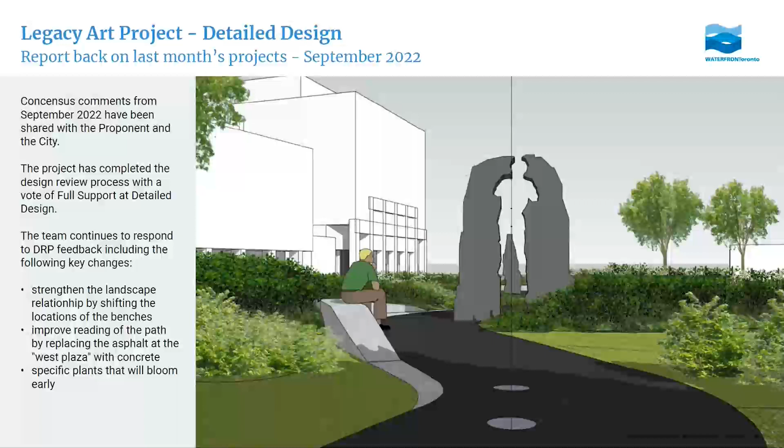Next slide. Love Park continues in construction. The red tile is all finished around the heart - you just can't see it because it's being protected with a wrapper of Tyvek. The catalpa tree is still alive, thankfully, in the middle of the pond.

A squirrel - yeah, so the project includes these little diadems, I think there's 8 or 10 of them, different animals that are going to be kind of hidden in the landscape that you can discover. The squirrel looks huge in that photo - how big are they? The scale is different than the person you see to the left. They're not that big, but there's a bunch of different animals going in there being cast.

Some of the trees have gone in, I think that's along the Queen's Quay frontage. Curbing's in, it looks quite beautiful, actually.

When is it expected to be open? It's going to open in the spring. We had been targeting the fall, and we decided not to because that would have meant commissioning the pond and then about a week later decommissioning it. So we slowed everything down on construction - not really, but they were going to try to crank to get it all finished, and we decided not to. So it's still coming along at a good pace.

Looking good. Pat, I don't know if you have anything to add - we're starting to install the trellis piece that we're assisting on, and that'll all be installed in the next month. So this would open like May, June, probably.

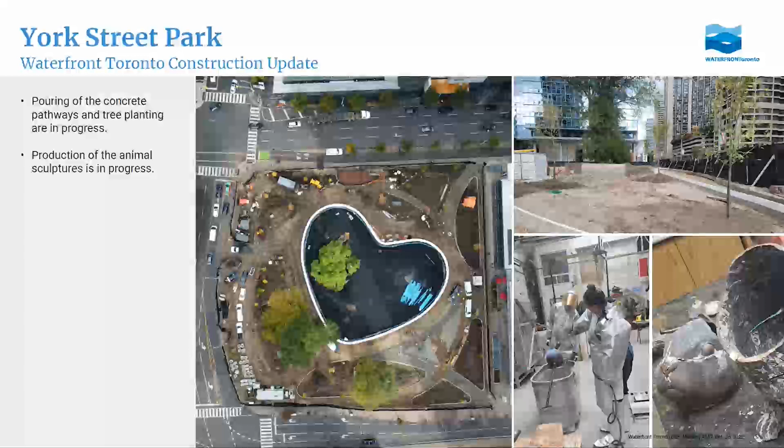Okay, next slide. Gorgeous. Yeah, that's brilliant.

You want to go through the upcoming agenda, Leon? Yeah, so next month will be the last DRP meeting of this year, and we are looking at Rees Street Park schematic design coming back. We also hope to bring both Destination Playground and the Destination Playground Pavilion back for schematic design. Jenna's team is working on the pavilion.

And for January next year, we are looking to bring back the Villiers stretch of the Waterfront East LRT to the panel. You've previously seen various segments of this East LRT. I think this will be a schematic design review, actually. And of course, Parliament Slip — that one is also gearing up to come back for schematic design.

Yeah, part of why we're bringing the Waterfront East LRT back is we've made a couple of changes to the original proposal, so we want to share those with the panel. Has the pool moved? Oh, I was talking about Villiers, not Parliament. In Parliament Slip, well, maybe — we're contemplating a few things. You guys gave us a pretty robust set of comments on it, so we've been reconceiving a whole bunch of aspects. It's going to look fairly different than what you saw last time.

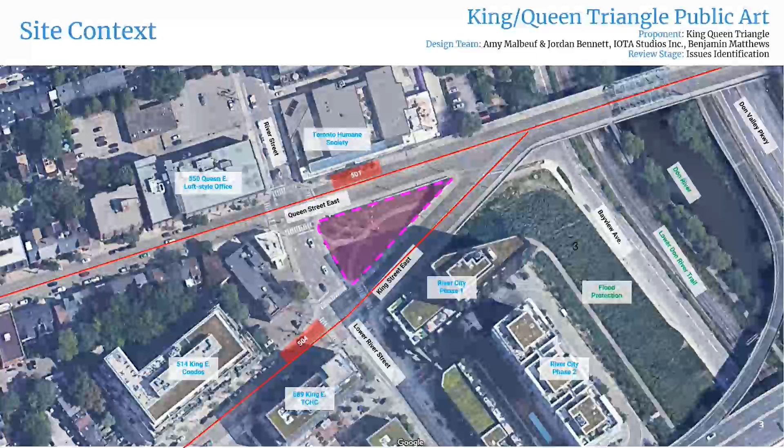Here's an aerial perspective of the site where you can see the adjacent buildings, the street details, the streetcar tracks on King and Queen Streets, the bus stop on King, and the forked path through the site. The river is nestled in the green swathe at the top of the slide. The triangular parcel of land is approximately 1,265 square meters.

The vision for this public art opportunity is to transform this undefined transitory area wedged between high traffic transportation corridors into a welcoming gathering space for nearby communities and the public at large. Given that the site received minimal public realm treatment, artists were given the opportunity to alter the site's landscape in order to accommodate the artwork and make the area more welcoming and accessible to the public. However, this can only be done in ways that do not undermine the integrity of the landform. So artists had to identify and subcontract a landscape architect familiar with the constraints and opportunities posed by this landform.

I'll read out the objectives set out in the artist call because I think they're important to keep in mind as we move forward. So the list of objectives in the call to artists read as follows.

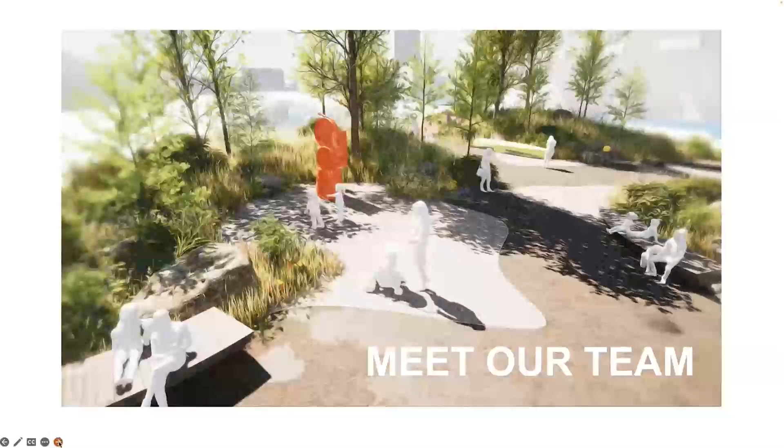Our team is highly experienced and includes Blackwell and their structural engineers who have worked on Jordan Bennett's well-known installation Tefkik, and is experienced in working closely with Indigenous individuals and artists. Mulvey & Banani are our electrical and lighting engineers and can integrate lighting design into the sculptures and walking paths. Grounded Engineering are our geotechnical engineers and will provide recommendations for foundations and earthworks.

We will be working with fabricator Punch Clock Metalworks, a metal fabricator located right in Toronto with public art experience at nearby sites. IOTA Studios, my organization, are the project managers for this public art portion, and Benjamin Matthews is our landscape designer, working closely with the artists selected for this opportunity, Amy Malbeuf and Jordan Bennett.

So led by the RFP requirements and also the project concept and the artistic concepts, the project principles and goals are creating a strong relationship to the surrounding streets and communities, creating a sense of comfort in an exposed and constrained space, encouraging visits and welcoming the public to stay. A landscape that further enriches the project narrative, tree and plant species selection that reinforce the overall concept, an emphasis on connections to water and the river, material innovations that weave into the storytelling, reaching outwards across the man-made boundaries of the street, the bridge, and the steep fall to the river system below.

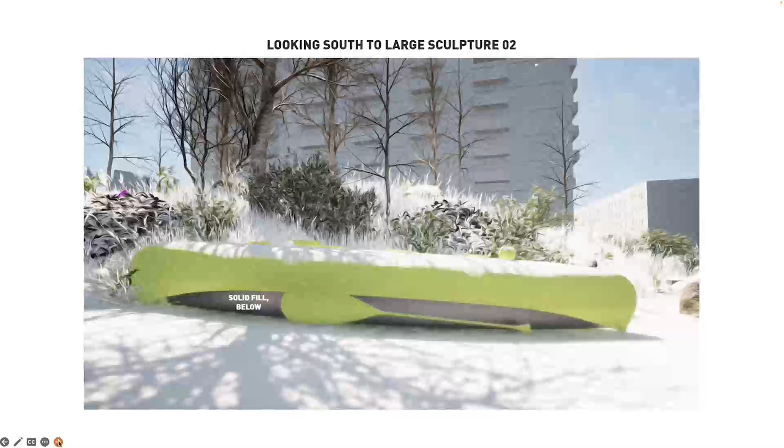We're interested in the history of the Don itself. We want to explore the natural meander it once had before it was straightened, and look at how people navigated this riverway before the industrialization of the city and the straightening of the meander itself. We looked into and explored the sediment and depositation of different wrack lines that can be formed throughout the movement of water, and how those wrack lines deposit debris, natural and man-made, along the rivers and waterways throughout our communities and gathering places in cities such as Toronto.

Through this concept, in conversation with Ben Matthews, we came up with the idea of exploring the storm wrack and placing our sculptural forms within the landscape to echo and create a narrative through the placement of each piece.

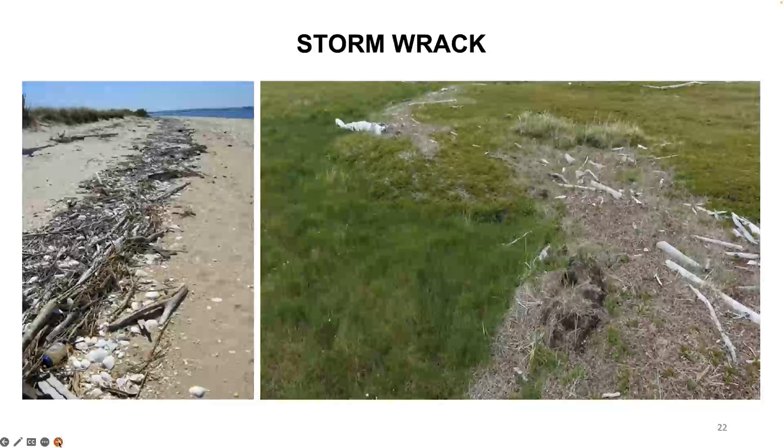This is more contextual to the site, looking at the various ways debris starts to hang up on bridges or natural features, and how we might learn from that and start to convey a story on the site that is both sculptural and landscape driven, hinting at a possible event or future use of the site through its forms and sedimentation of natural materials, but also man-made materials.

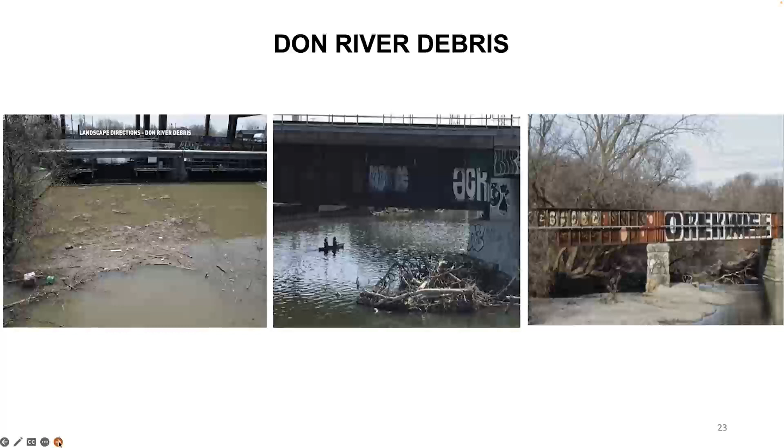Here are some examples of the more man-made deposits that you may be familiar with in the city. Showing this history, you can really see the history of a place, an event, a moment, or an individual story through the depositation of different elements.

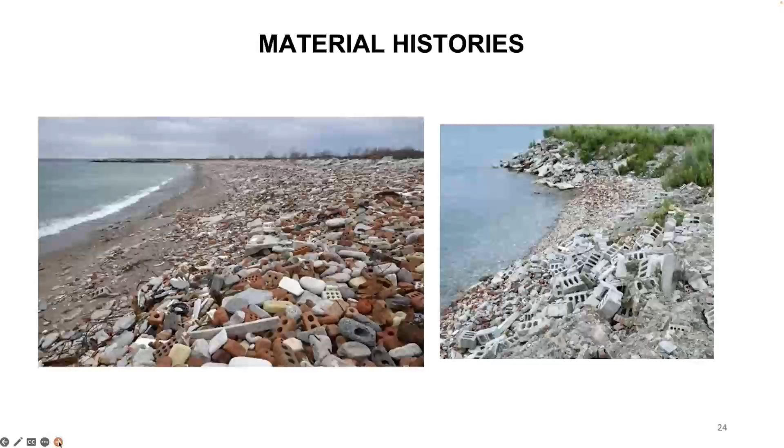Discovery through movement is huge for us, creating this narrative for visitors, for people coming through the space, and for people who call this part of town home. The gathering of multiple stories and material histories is parallel to the city of Toronto as a site where various Indigenous nations have historically and still reside and gather today.

As I mentioned earlier, we pulled inspiration from a canoe trip we were on. From this inspiration and experience, we were able to place ourselves in a creative space to conceptualize this project. Through meeting with local community and invested community groups, we will continue to refine and explore this inspiration and add to the concept. We're really excited to be coming to the city to meet with folks in the near future.

The objects that we place in the land are figuratively and metaphorically what you might take with you to survive and thrive in the event of the catastrophic flood. Their placement depends on how they would physically be deposited due to the rise of water levels and where they sit on the wrack lines created by that rise.

Through thinking about the resilience of Indigenous people, of hardships faced, and how we have continued to thrive through our use of humor, color, and art from our respective communities, we imagined a whimsical, colorful installation teeming with points of conversation, visiting, and awe for everyone who passes through the space.

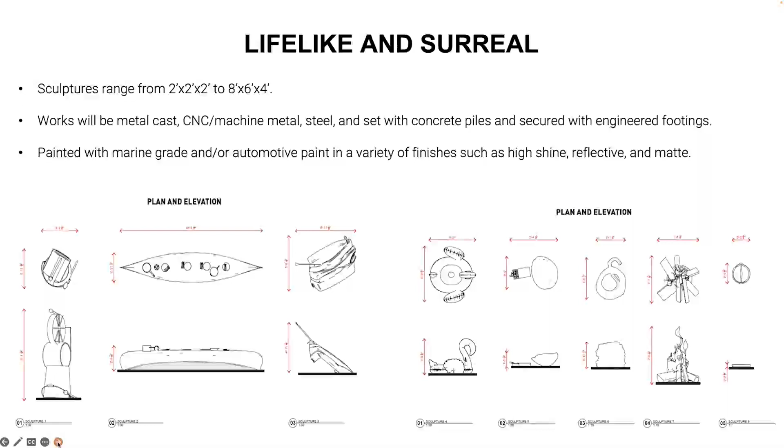The sculptural elements are relatable, tangible, and can generate an individual's own stories or narratives from their own point of reference. Some examples are a canoe and a cultural belonging such as a smudge bowl and other things you may have with you on this trip.

This point of thriving, the power of the object comes from the relatability of the objects. They pull story from the individual visitors to the site so that they can sit with and visit with their own stories. For myself and Amy and our team, this idea of visiting is very important as it informs our communities still today. Thank you.

Thanks, Jordan. So this is the site plan as it stands today. Again, you're seeing the FPL crest halfway through that site with the dashed line. Everything on the right side of that is the wet side, on the left side, the dry side.

As in nature, I think a lot of the deposits, landscape and also sculptural, occur above this crest, as if they had washed over in one of these larger events and begun to cluster around natural features, rock outcroppings, trees, little gullies in the landscape. There are a couple features below this FPL crest that we'd like to explore. They do become more complex with the low cover above the landform.

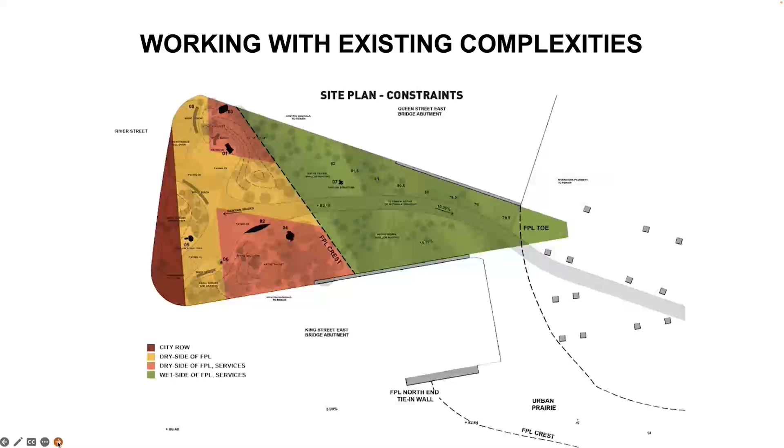You'll see here, this is the existing grading plan. Above the FPL crest, slopes are around 2%. However, as you start to move down towards the river, the pathway is just above 10%. For the time being, we've been told to leave the path as is, so the accessibility on that portion is a bit limited. Next slide, please. We're going to be looking here at an aerial view of the site.

You'll see existing, there are actually 17 small trees, pyramidal oaks and maples. Some of them were actually planted on the wet side of the FPL, which they should not have, and others are not doing so great. So we will need to replace trees as we move forward and also increase the amount.

The existing hardscape is asphalt pathway, and there are 8 large slabs of armor stone as well that we have considered for removal or reuse on site. And then, as you saw in the earlier photos, there's the concrete abutments that sort of create the triangle. Next slide, please.

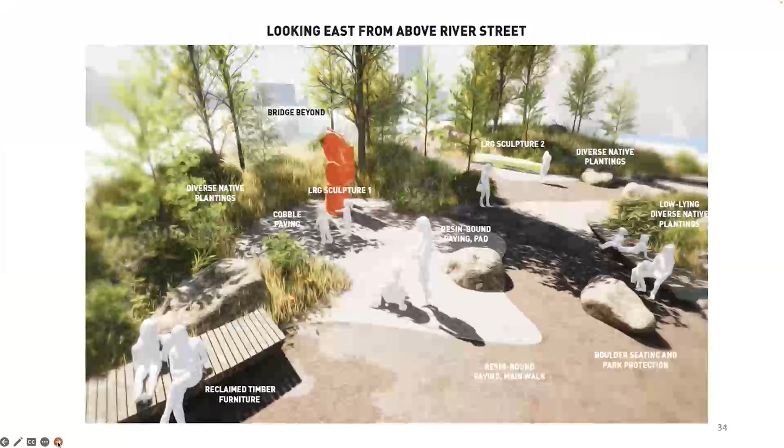The other piece of the material puzzle is the furniture. If you go to the next slide, please, which is expressed in a few small wooden benches that start to cup the landscape areas and accentuate the soft curves of the wrack lines.

We're excited to explore sourcing of these materials that is eco-friendly, and also starting to explore the form of these, looking to play off of those images we saw of the debris formations around bridges, how this timber furniture can really become unique and expressive. Next slide, please.

Here we are looking from the west side across the main plaza space adjacent to River Street. The planting areas are all native plants, low maintenance. The hardscape areas, you'll see there's sort of pads of varying colors and shapes. These would be the resin-bound pads in the foreground, and the main pathway as well.

Next slide, please. Just a front-on view to the wooden benches. These would be places to stop and invite people to stay a while. They would also be opportunities for additional lighting beyond what is supplied at the street and in the sculptures.

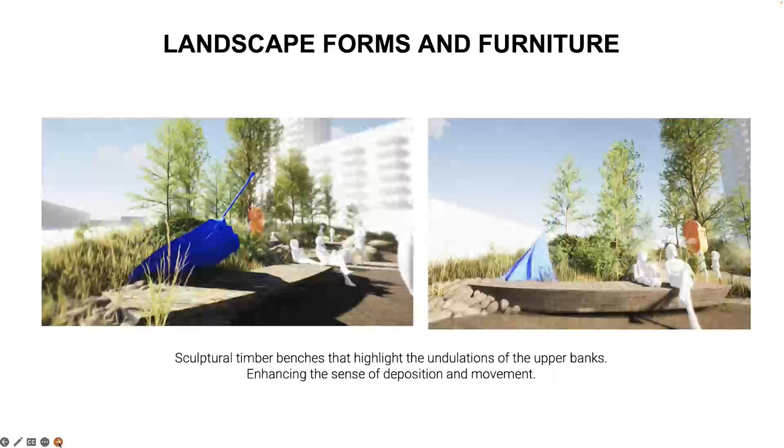Next slide, please. So again, just in terms of planting, the wet side augmentation of the existing high grass prairie, which has currently become a mown lawn. It hasn't been maintained the way it could be, so we'd like to look into maintenance strategies that will allow for that to become much more natural.

And then the feeling of the shoreline really wants to be expressed on this side of the FPL crest, and we'll be working hopefully with the TRCA, with parks, and also groups involved with the Don River and Portlands projects, Minokamik, to start to think about plantings that are both ecologically valuable, but culturally as well.

Next slide, please. In terms of lighting, since it's a small zone, we don't think additional lampposts will be needed. Lighting will be much more aesthetic and architectural, with a little bit of path lighting needed, so soft washes over trees and grasses, as well as onto sculptures.

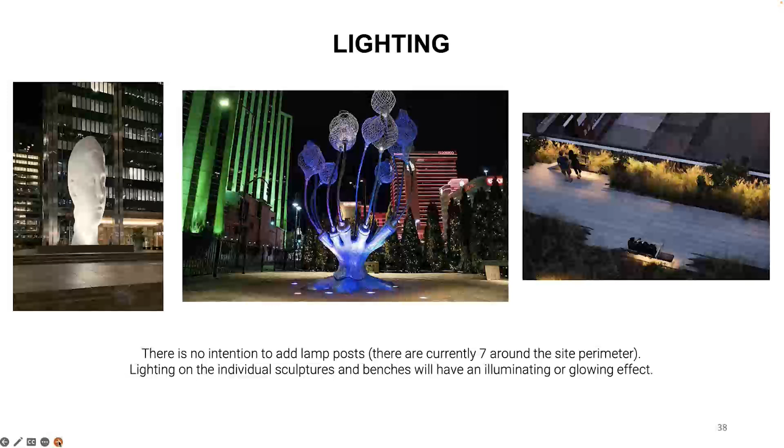Jordan, do you want to speak to this one? I think this is a really playful moment.

So this is an example of what I was talking about earlier, this thriving and this use of humor within our communities, and looking forward to see the bright in sometimes the dark. So this is just one way for us to show this thriving, this resilience of Indigenous people, and this joy and playfulness that our community still holds strong in our everyday. So, well, thank you, everyone.

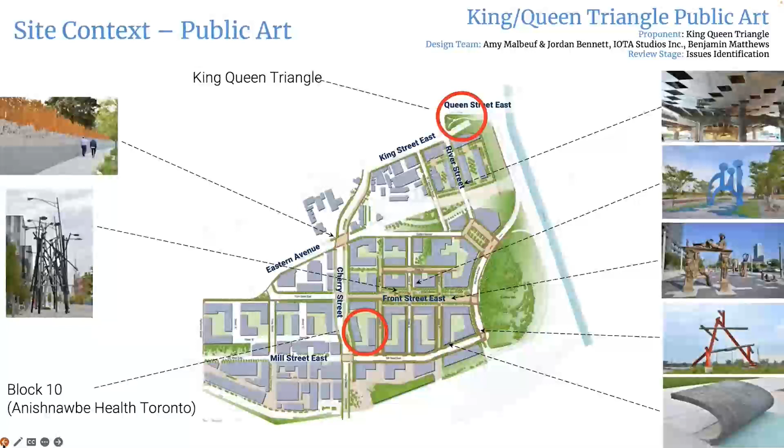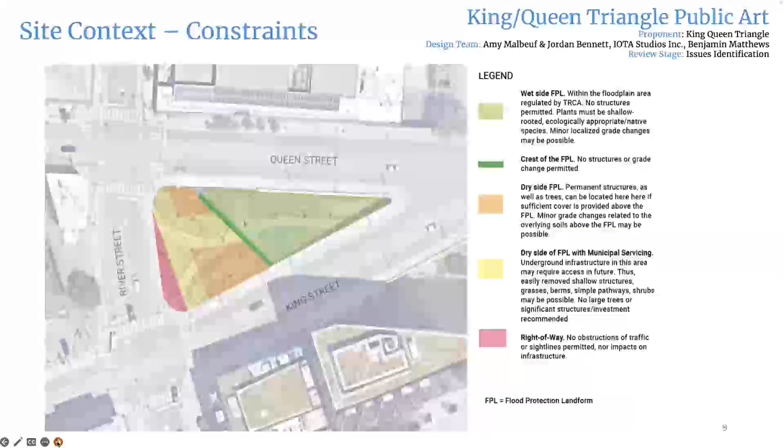Yeah, would you want to discourage it? It's a good question, I don't think so. I think there will be, if you saw the renderings, natural borders and boulders and such, so it won't be as direct a route as it is today. I wouldn't want a fence and a sign that says please dismount, but I think naturally, as it gets used more by pedestrians, it will feel much more like a pedestrian zone than a cyclist zone.

Thanks. Murray, I think slide 5, can we take a look at maybe slide 5 or so? There's one of the context slides with an aerial view showing the surrounding context. Slide 3 or so, a bit further up. Further up, okay, yeah, at the beginning. Yes, there we go, thank you. I can't see all of the slide numbers. There we go, okay, there we go. This good? Yeah.

So, from when I've gone to the site, I can see that most people, when they walk through the site, they're crossing King Street and going towards Queen or vice versa. That's how they cross the site, at the base of the triangle.

And as I say, the few cyclists just go down underneath the viaduct. But mostly the flow of people cross King Street going towards Queen Street or vice versa. I don't know if that helps, but we can definitely come back in the next session with more information on that. Thanks, okay.

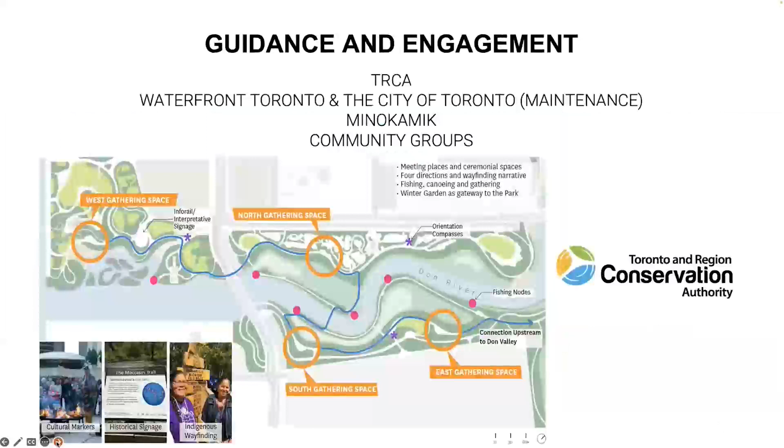One of the cues that I had, if you go to page 40 on your presentation for a second. I'll just warn you, it's going to flip a little fast. While she's doing that, can I ask a question? When you say top, do you mean the apex of the triangle? No, actually closer to the street. Okay, so if we go there—oh, you could go back to the previous one. Actually that was fine, this one? Yeah, this one, slide 39 is good.

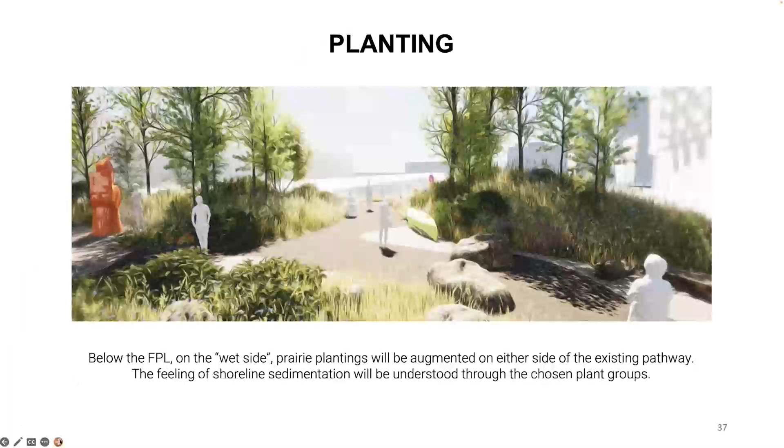I'm just looking—it's probably a bit of a caricature, but you're talking about if a maintenance vehicle comes right where people have to access the park. You're not necessarily going to have both at the same time, but it may happen. So looking at how people, even in the worst case scenario, come through the site, access it, and how these things are integrated within the landscape without creating accessibility issues.

Maintaining the circulation is something to think about. I used to live around there, and I always thought it was a great opportunity, especially around the river, for more of a sense of a place where you can gather. Maybe it's just a little bit generous, and I think it can continue to evolve into something more. You referred to it earlier as a plaza, but I think it just needs to be a little bit more than what we have there.

The other comments I have are with regard to the treatment of the wall. I think that must be included—anything you can do to include that in the scope, because it's such a predominant piece. It's part of the space. It's not the horizontal plane, it's the vertical plane, but it's absolutely part of the experience.

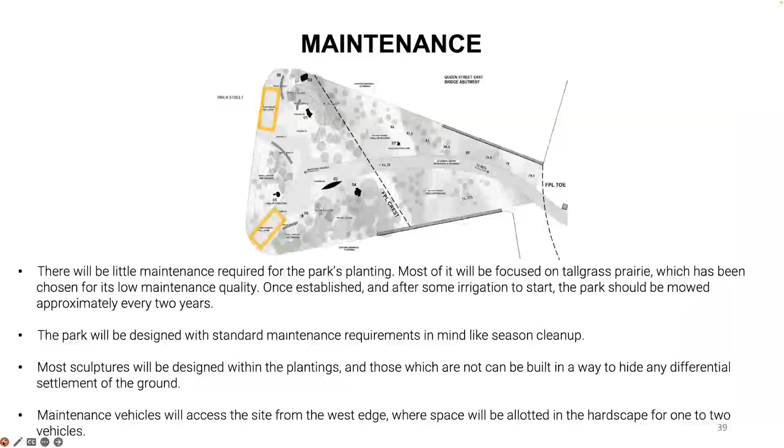Can I just say, following on from Betsy, could you go to the aerial photograph again? It's just a question of clarification. It would be toward the beginning, I think. There is already a path down to Bayview on the south side of King, but that's not a bike path, is it? Or it's just the sidewalk. It goes down the hill in addition to the sidewalk on King. Like so much paving, like everywhere.

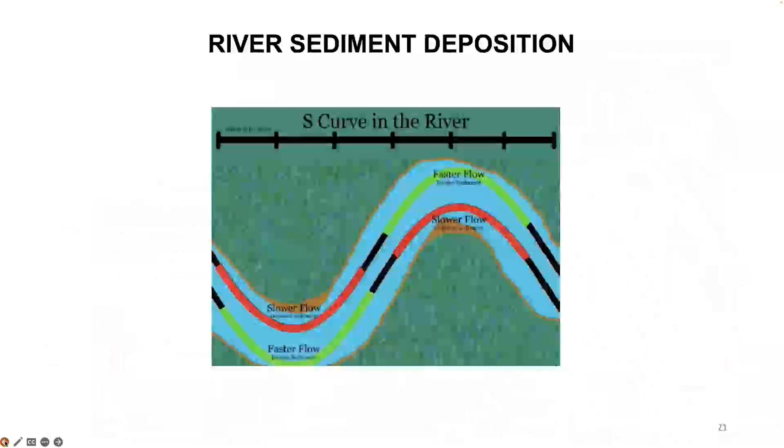Can I say one more thing too? Let's find this image. The aerial, the area there, yes. See the path going down south of King, but River City? Yeah, but in front of River City, going down to George, that's right. That connects you through to Corktown Common as well. There's like a lot of ways to get to Corktown Common from that triangle.

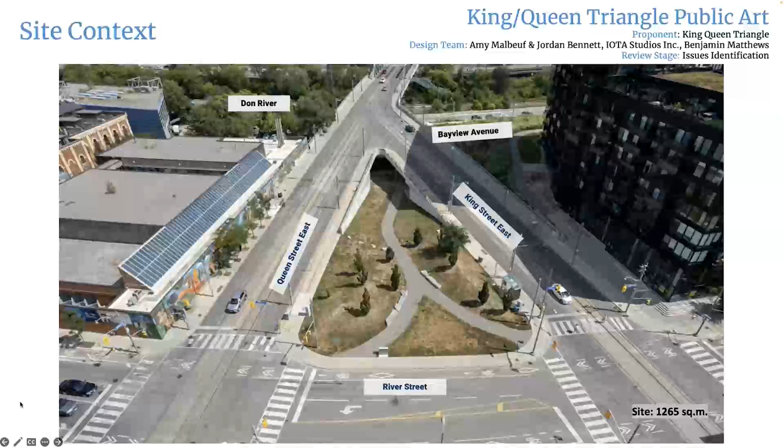I'm finished. Oh, I just wanted to go to slide 35, kind of further my point, which wasn't very well made. Yeah, that was good too. Is that 35? This is 35, yes. I'm looking for the one that says looking east from above the river.

Yeah, that one. So just to hammer away at my point, I think that this should all be about the art. Again, I'm just saying it again. So that would mean the elimination of benches, or figuring them out differently. What I'm focusing on scale-wise too is wooden benches, boulder seating, and it seems to be interfering with the kind of primary point of this space. So I would try to eliminate those if I could. Or if you're going to reuse the boulders, put them somewhere where it's not interfering with the reading of the sculptures.

Okay, I think, any other last comments from anyone? No? Okay, I'm gonna try and summarize the main themes here, and you'll get a chance to respond after the summary. I think you're hearing strong support and a lot of enthusiasm for this concept. Many suggestions made that I'll highlight, and I think the focus from here on is attention to detail as the design continues to evolve. So let's go through the various themes that I think the panel has shared.

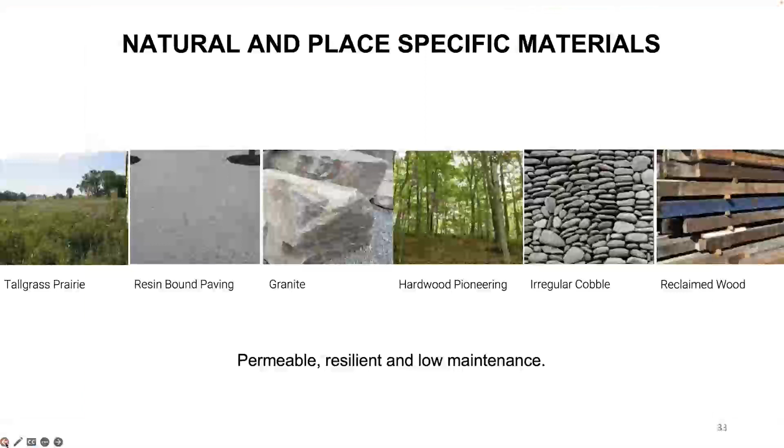Also the notion of celebrating the glimpse or view of the Don River. As you're there and go down towards the river, you can't really see the water, but you have a sense that it's out there. There might be an opportunity to create a special spot to celebrate that glimpse and contemplate the history of the Don, especially that one slide you had, which I found fascinating. I'd love a copy of that about straightening the Don River that public works folks must have done ages ago, and the wonderful meandering of the Don and how it was considered such an improvement to straighten it.

A couple of other themes about how the site is perceived and experienced from King and Queen as a pedestrian, as a streetcar rider, as a cyclist, etc. And that sense of focus on discovery, because it will be a very unique, small, intimate place in the city, and people will want to go there. That element of surprise of 'oh my God, look at this, I didn't know this was here' - we thought I'd go explore this and learn more about this. All those things are very important.

In summary, the panel is really enthusiastic about where this has gone so far, and we look forward to seeing it come back. I hope those suggestions are helpful to you as you work through the details.

So George is staring at this. I have a sense there's a question or a comment. Well...

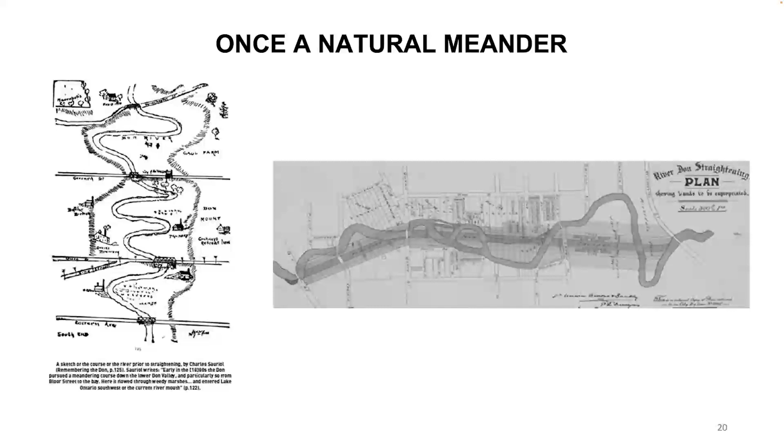I think that feedback would be more for Chloe to consider, if our requirements shift a little to have more dynamic landscaping there. Besides that, I agree the traffic planning needs to be considered, and that's another item for Waterfront - we're kind of bound by the triangle, so the cyclists and pedestrians coming in and out are kind of outside our jurisdiction a little bit, but there's probably some potential there, though that will come with some budget constraints. Chloe mentioned the budget earlier, and we were instructed to minimize our touching of the path as much as we could. But Chloe, if you want to speak to that more.

I think it wasn't so much an instruction not to touch the path. When we talked to Parks, Forestry and Recreation, it was all about budget. You could do an incredible switchback, but it would just break the budget, the whole budget would go towards that. So I think what they were suggesting was, if you want to focus on the dry side and reconfigure that, then just tie into the wet side, because your budget just won't stretch. It wasn't so much a requirement as a suggestion that we really had to look at the budget constraints.

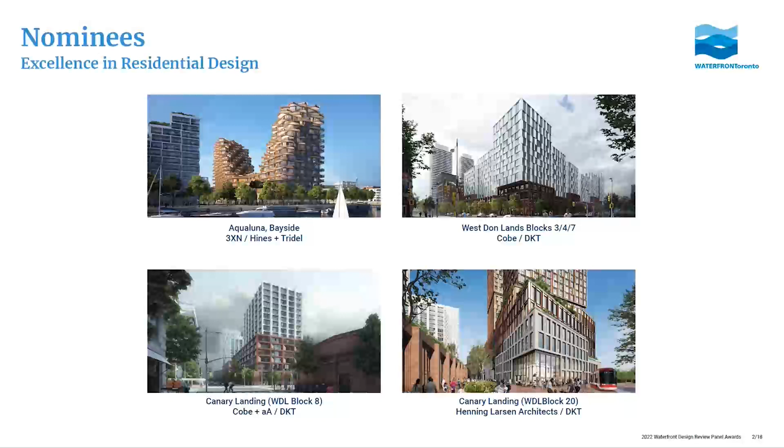Leon, I believe you want to share some slides as we go through this so people can relate to the different nominees. The nominees are Aqualuna, the West Don Lands blocks 3, 4, and 7, Canary Landing West Don Lands block 8, and Canary Landing West Don Lands block 20. And the winner is Canary Landing, block 8, 125 Mill Street.

The design team is Cobe Design Architects Alliance, the Architect of Record; CCXA, formerly Claude Cormier and Associates, Landscape Architect; and Thornton Tomasetti Canada, Structural Engineer.

The client is Dream and Kilmer Group and Tricon Residential. Canary Landing's design, particularly the use of the refined cladding and contrasting treatment of the lower and upper floors, successfully references the heritage aspect of the precinct in a contemporary way. The gently curving precast cladding on the upper volumes echoes the grain silos that once dotted the waterfront, and the detailed brickwork on the lower volumes and in the public realm ties the site into the historic distillery district across the street. Canary Landing is a remarkable and sophisticated project that raises the bar for residential design.

So would you gentlemen please come up, and or ladies, who are responsible for this wonderful creation.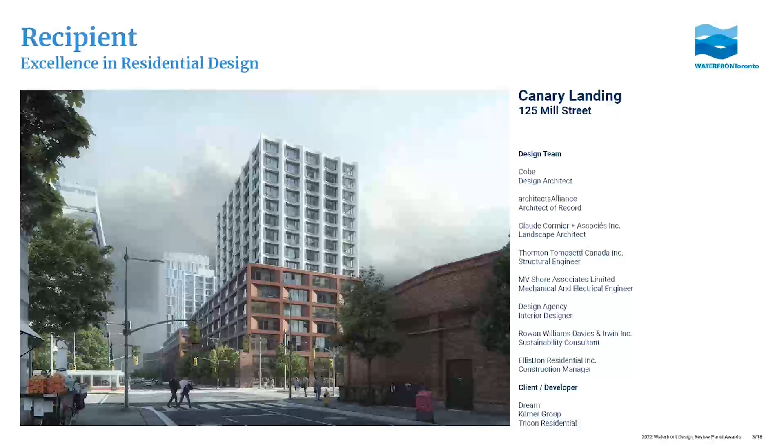Second award of the day is for excellence in commercial and/or institutional design, for a non-residential use building such as commercial, institutional, or infrastructural.

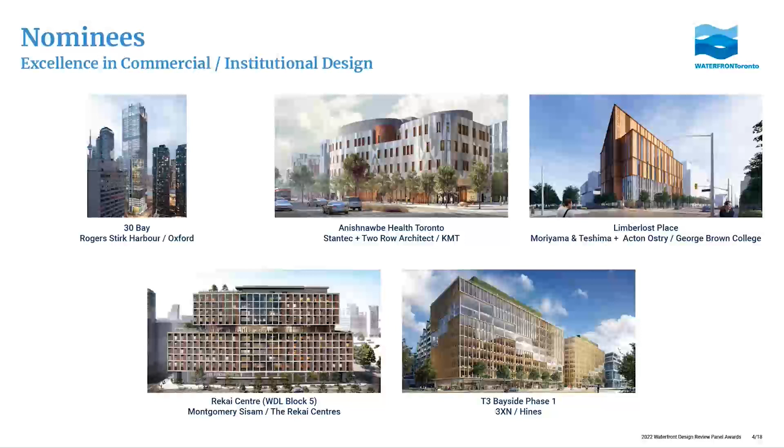The nominees are 30 Bay Street, Anishnawbe Health Toronto at the Indigenous Hub, Limberlost Place, the Rekai Centre, and T3 Bayside Phase 1. And the winner is T3 Bayside Phase 1.

The award goes to the team led by 3XN, WZMH, Janet Rosenberg and Studio, Magnusson Klemencic, and the developer is Hines. T3 Bayside's design represents an exceptionally ambitious and provocative commercial building.

The project's use of mass timber is elegantly supported by its simple massing, punctuated by a string of double-height social spaces skillfully woven through the office floors. The innovation in mass timber is much needed as we grapple with the economic and environmental impacts of traditional construction methods. This building is a seminal project for the Toronto waterfront that sets a clear pathway for future high-quality commercial buildings in Canada. Please come up to accept your award.

Congratulations. All right, 3, 2, 1. 4, 3, 2, 1. Thank you. Okay, thank you very much.

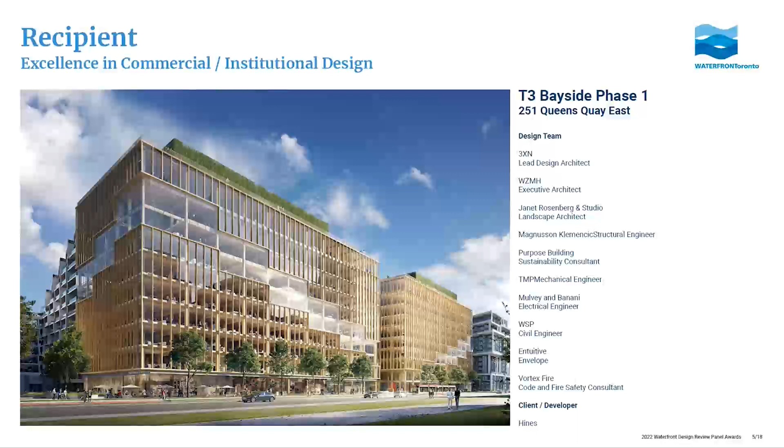The next award is in the category of Excellence in Public Landscape Design for a park, streetscape, or other public open space project. The project must have been completed in the design review process 2019 to 2021. The nominees are Anishnawbe Health Toronto Indigenous Hub, East Bayfront Boardwalk, Gardiner Lakeshore East Public Realm, Port Lands Flood Protection River and Parks, and the York Street Park.

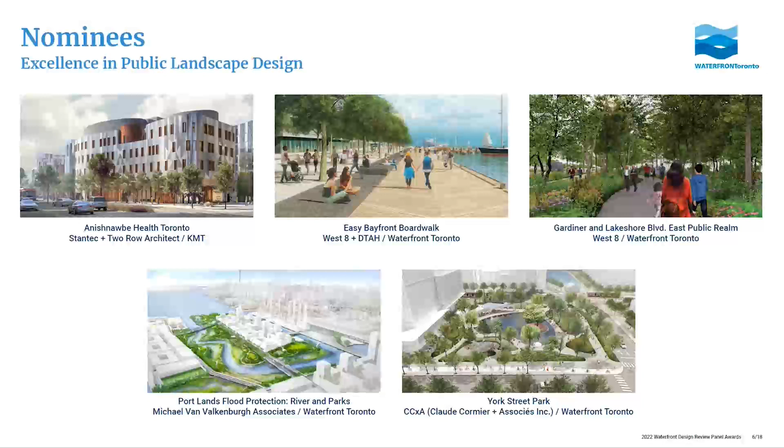The winner is the Port Lands Flood Protection River and Parks.

This award goes to the team led by Michael Van Valkenburgh Associates, design lead and landscape architect. A representative of the firm is not able to be here today because Emily, who is a member of the panel, her twins came down with COVID and she didn't want to travel and risk anything. So she's at home, but I believe she is on remotely now. I hope, Emily, you're there and you can hear us. I'm here. Great, great.

The client and developer is, of course, Waterfront Toronto. The new river and park in the Port Lands flood protection project represents realization of a 50-year dream to reclaim the mouth of the Don River. The design sets a global precedent for the transformation of flood-prone post-industrial waterfronts into climate-resilient, ecologically rich, and socially inclusive urban districts. The new river channel successfully references the dynamic and complex estuary systems found in the Great Lakes, and the design of the park skillfully integrates diverse recreational program with a forested buffer to create what will be one of the most significant new park systems in Toronto's history.

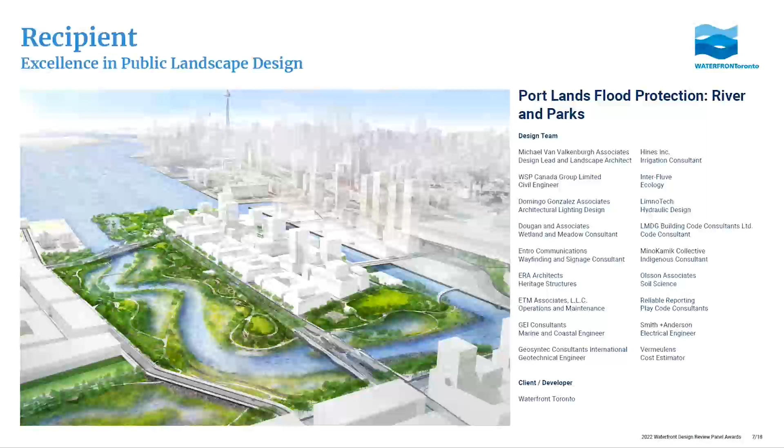The fourth award of the day is given for excellence in planning or urban design for a precinct plan, a master plan, public open space plan, or development plan. The nominees this year are the Gardiner and Lakeshore Boulevard East Public Realm. And can anyone guess the winner? Gardiner and Lakeshore Boulevard East Public Realm.

The award goes to the team led by West 8 and Dillon Consulting, and the client is Waterfront Toronto. The design of the Lakeshore Boulevard Public Realm sets a new precedent for human-scale, pedestrian-friendly infrastructure. By creating a network of green linkages along the corridor, a vibrant public realm will emerge in a formerly desolate area. This project exemplifies how novel forms of public open space can be developed out of idiosyncratic, residual, and contested spaces. The design successfully blurs park and infrastructure, a truly innovative and critical initiative that will facilitate recalibrating the relationship that citizens of the city have to this area. Please come up and accept your award.

Jump in this one, too. All right, 3, 2, 1. One more, 3, 2, 1. Thank you.

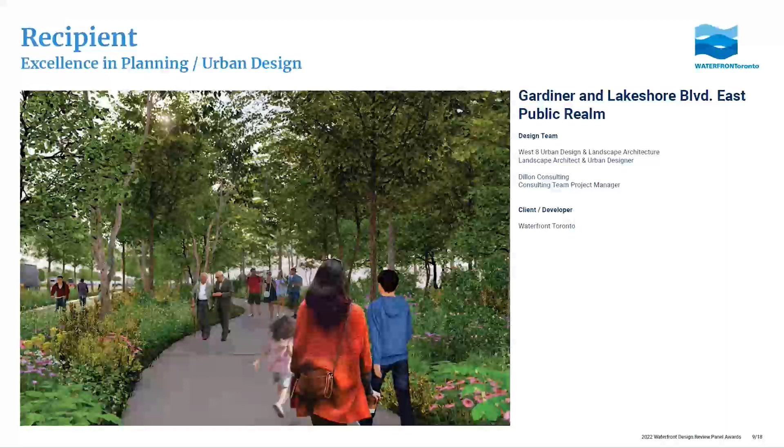Okay, great. The next category is excellence in design innovation, for a project that addresses environmental, social, and other contemporary issues through design and research. Project must have been completed, of course, in the last 3 years, as in the others. The nominees are the Indigenous Hub, West Don Lands Block 10, Lakeshore Pilot Project, Limberlost Place, the Rekai Centre, West Don Lands Block 5, and T3 Bayside Phase 1.

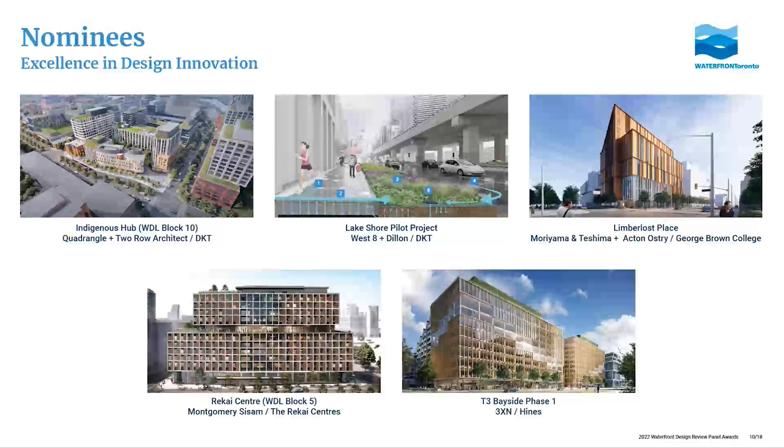And the winner is Limberlost Place, 185 Queens Quay East. The design team is Moriyama and Teshima, Acton Ostry Architects, Studio TLA Landscape Architect, Fast + Epp Structural Engineer, and of course the client is George Brown College.

The design of Limberlost Place features innovation throughout. A combination of elements, including solar chimneys, rooftop photovoltaic panels, decentralized mechanical systems, ventilated hallways, and operable windows allows the building to have zero carbon emissions. The passive ventilation mode allows the building to operate passively 50% of the year. The team is also to be commended for their willingness to leverage the project for market transformation, pushing policy and sharing lessons learned to build industry capacity. The project will be an exemplar for all institutional projects. Congratulations.

3, 2, 1. More. 3, 2, 1. One more. Oh, no. Oh. Thanks. Great.

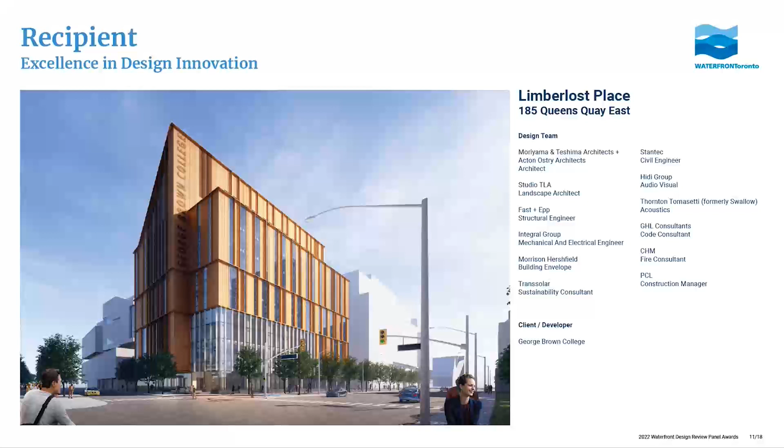So the next two awards are for excellence in built work. This series of awards is for a completed building, landscape, infrastructure, or neighborhood that delivers on the original design intent. The project must have finished construction between 2019 and 2021. This year we have two awards in this category. The nominees are Aquabella, River City Buildings RC3 and RC4, Stormwater Management Facility, Tommy Thompson Park Pavilion, and 10 York.

3, 2, 1. One more. Thank you.

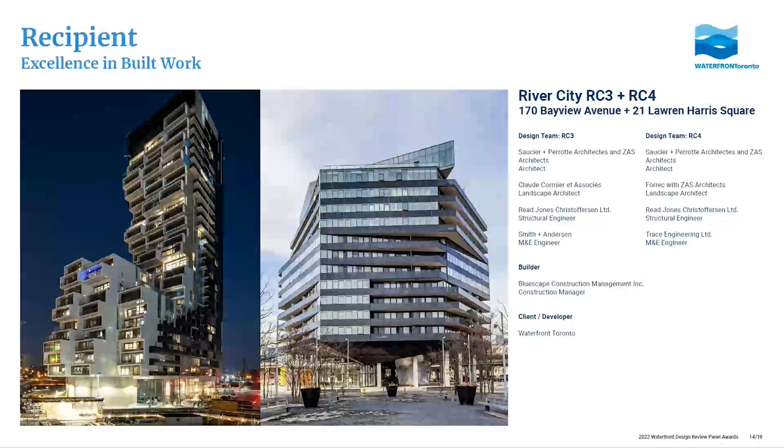Number 8, the Hall of Fame category. As Chris said at the beginning, we created this category for projects that had been around for a minimum of 5 years, I believe. This is for a completed building, landscape, infrastructure, neighborhood, or master plan whose contributions to the waterfront have been significant, catalytic, and enduring. The project must have been built more than 5 years ago. The winner in this category is the wave decks for the Toronto waterfront.